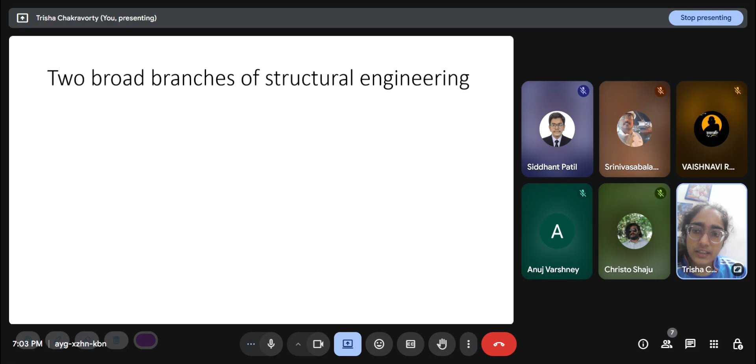There are two broad branches of structural engineering: analysis and design. Analysis is the forward problem. In analysis, we would be given the structural dimensions, boundary conditions, applied loads. So we know everything about the structure, and we want to find out the response induced in the structure, which can be in terms of forces, stresses, deflections or strains.

And in design it is the inverse problem. So we are given the loads that have to be withstood by the structure and some criteria on maximum deflection. The loads have to do with the collapse limit states, and the maximum deflection etc are related to the serviceability limit states. For design, we are given those loads and some constraints, like we cannot decide all the boundary conditions ourselves because there will be some architectural considerations. Then first we have to carry out an analysis, like find the optimum size of structural elements.

How do we do that? We assume some size of the element and some material properties, and then we carry out an analysis. Given these loads, we take our assumed structural dimensions and material, and then we carry out an analysis. So we get the response in the structure, and then we see if that response is good enough, that is, is my structure good enough to take those loads. So design and analysis are not exactly opposites, they are more like two parts of structural design.

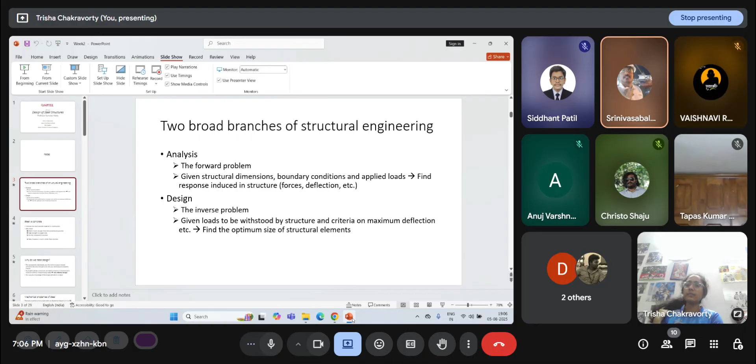So analysis and design, even though analysis is called the forward problem and design the inverse problem, they are not really opposites of each other. They are two branches, and we need analysis for design. The purpose of learning analysis is because we, as structural engineers, ultimately want to design structures.

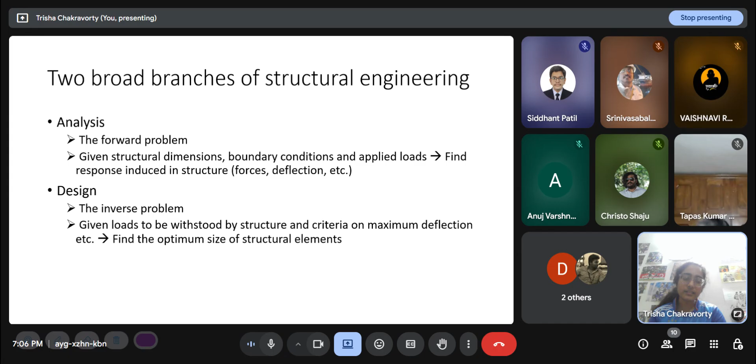Steel versus concrete is always a debate because there are a lot of factors to be considered, and in some cases concrete is more economically viable, in some cases steel is. Concrete is the most versatile material for construction because it can be cast into any shape we want so long as we have the formwork. But then why should we use steel? Because steel is much stronger than conventional concrete.

I spoke about this in the last class. As you would have studied in RCC structures already, even in concrete structures we have steel reinforcements inside the concrete. Why do we have that? Because concrete has no strength in tension. Its entire strength is compressive.

To take the tension, we have to give steel anyway. So we carry out analysis and see in which parts of the structure we expect tension to appear, and there we put the reinforcements. We don't generally put it all along the section.

For bending in a simply supported beam, if it is bending like this, we know the bottom fibers will be under tension, so we put the steel reinforcement in the bottom. While near the supports there might be a hogging moment, so there will be tension on the top fibers, and we put steel reinforcements on top.

But that is concrete structures with steel reinforcements. Steel is needed because concrete has no strength in tension at all, but even in compression steel is much stronger. So steel as a whole is much stronger than conventional concrete, with high strength to weight ratio, because steel is also very lightweight.

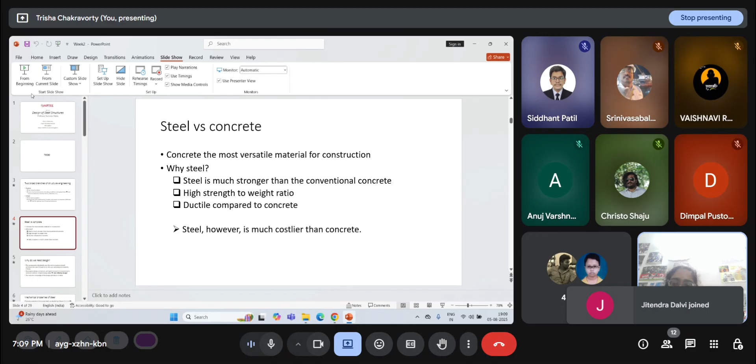In the stress strain curve of steel, we have seen in last class that even after yielding, the strain can increase to a large extent while the stress increases much less. But that strain increment is important for us, because if some element in my structure has reached yielding and is deforming rapidly, we can see that it is about to fail, something is going to happen.

Especially in extreme conditions like earthquake or wind loading, if the structure fails slowly it gives warning, with falling of concrete and so on, and we will have time to evacuate. We want the structure not to collapse at all, but if it is about to collapse, we would want first to save human lives.

So the fact that steel is more ductile than concrete is a factor in its favor. Even in RCC design, if you look at the design criteria in IS 456, you'll see that we want the steel reinforcement to fail before the concrete does, because if concrete fails first, it will be an immediate collapse with no warning time.

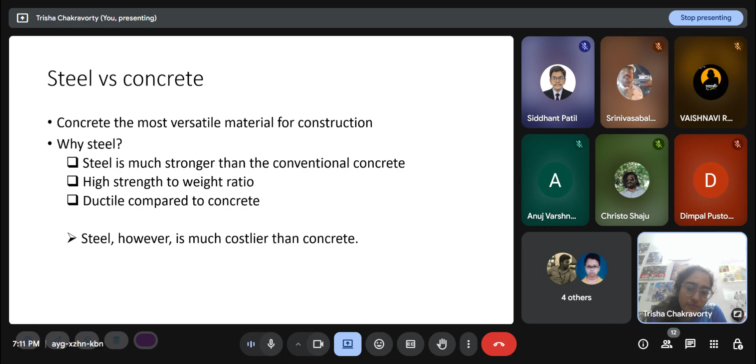However, steel is much costlier than concrete, so that is a main roadblock in using steel everywhere. Generally, residential and institutional buildings we see around us are majorly constructed of concrete. It's the critical structures where we go for steel.

And why do we need design? This whole course is about design. We need design because the components individually and the entire structure should withstand the load throughout its lifespan, satisfying serviceability criteria.

Withstanding the load is the collapse limit state, the ultimate limit state, and serviceability criteria are generally the deflection criteria. And there is a lifespan, because we cannot guarantee that a structure will withstand all loads forever.

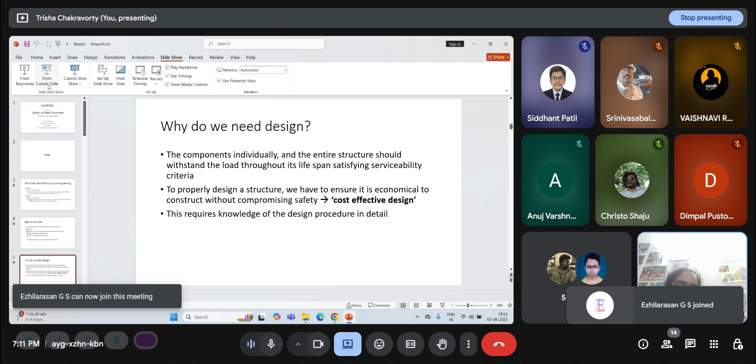So we generally put a lifespan, a time limit after which it will require major repair, because the materials we construct with today will undergo fatigue loading, lose some strength, and behave differently 10 or 20 years from now. So we have a lifespan of 50 years for residential buildings and 75 years for bridges or commercial buildings.

After that, we should hire a civil engineer who will do a structural health monitoring and suggest where and how we need major repair, because we don't generally pull down the structure after 50 years and rebuild it, since there are economic constraints. So we can address the places where there are issues.

And to properly design a structure, we have to ensure that it is economical to construct without compromising safety.

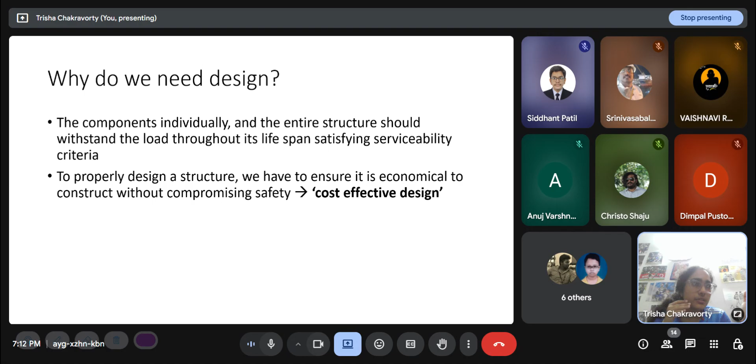This is cost effective design. We cannot make a structure infinitely safe. Look at the columns and beams around you. If you give a larger cross section to the columns and beams, it would affect the utility, and it would make the structure safer, but much more expensive. The purpose of building residential or commercial buildings is that people should be able to afford and use them, otherwise there is no profit for the builder. So there are a lot of other factors apart from safety, and for that we need cost effective design.

Only when we know all the design procedure in detail will we, as structural engineers, be able to find the best way where a certain level of safety is maintained while we reduce the cost.

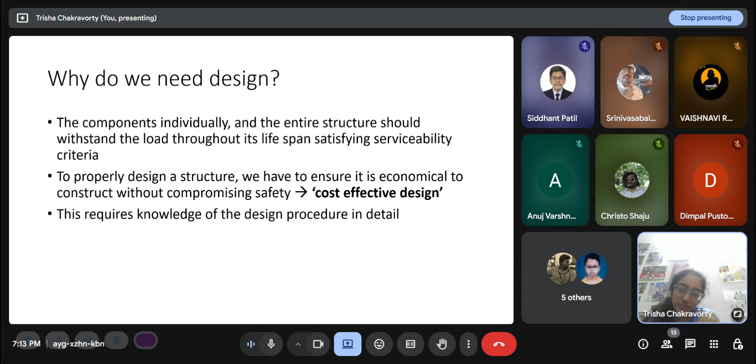Mechanical properties of steel: physical properties of structural steel as detailed by clause 2.2.4.1 of IS 800:2007, the Indian Standard Code for Steel Design. Irrespective of its grade, there are five properties mentioned. The density, or unit mass, is denoted by rho, which is 7850 kg per meter cube.

Modulus of elasticity, or Young's modulus, is the initial slope of the stress-strain curve during its linear regime, denoted by E. It is 2 into 10 to the power 5 Newton per millimeter square.

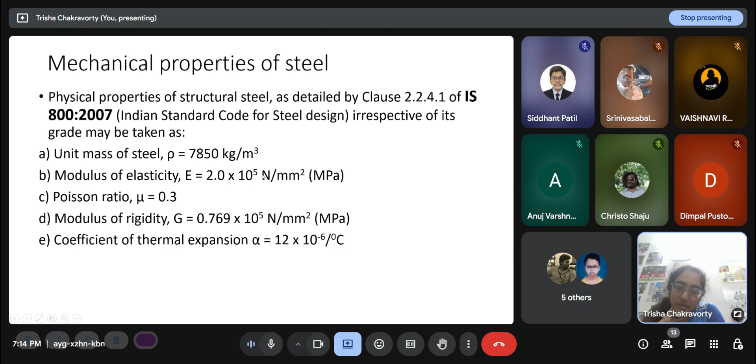This unit, Newton per millimeter square, is actually megapascal, because Pascal is the SI unit, Newton per meter square. Since there is millimeter square in the denominator, a 10 to the power minus 6 factor comes in the denominator, so in the numerator it becomes 10 to the power 6 Pascal, that is megapascal. I'm saying this because this is a unit we encounter very frequently in questions, so stick to the unit system.

A lot of people even at this age make mistakes about units, because it seems a trivial issue, but you should always calculate carefully. You should stick to megapascal or pascal, stick to SI units. That is the safest thing.

Poisson's ratio mu is 0.3. Modulus of rigidity G is the shear modulus, it is 0.769 into 10 to the power 5 megapascal, and the coefficient of thermal expansion alpha is 12 into 10 to the power minus 6 per degree centigrade.

But these are properties that are generally not used directly in design, even though we might need them in some other places. In the design procedure, step by step, we generally don't need this. We need these two properties instead.

The principal mechanical properties of structural steel important in design are the yield stress Fy and the tensile or ultimate stress Fu, which we get from the stress-strain curve. As we discussed in the last class in detail, this is a linear regime up to point A.

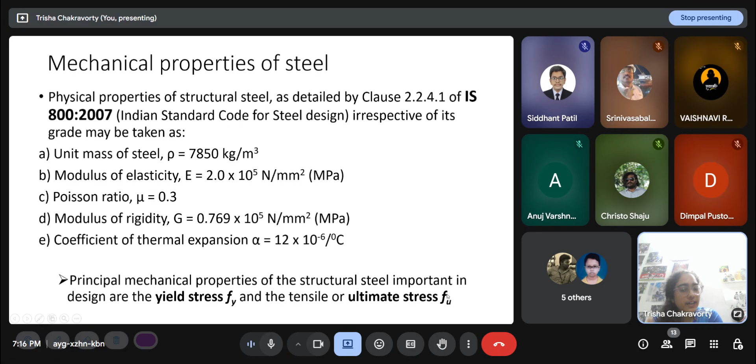There are of course a lot of grades of steel, and this is an important point: these five properties are taken as constants irrespective of grade, but yield stress and ultimate stress heavily depend on the grade of steel you are using. So in one grade, Fe 410, 250 is the yield stress.

After this yield point, the material shows a sharp decrease in the slope of the curve. So for a small increase in stress, there is a rapid increase in strain. After that, E is the ultimate stress point, because it is the highest point in the curve, and stress is plotted on the y-axis. E has the maximum stress, and for Fe 410, the ultimate stress is 410.

After E, we cannot really use the structure anymore because we have to consider it has failed, since even without an increase in stress, the strain increases, and it eventually fails. It eventually fractures at F. But for our purpose, we can consider E as the failure point. It fractures at F, but after E there is no use of the structure anymore; it will just go and fail.

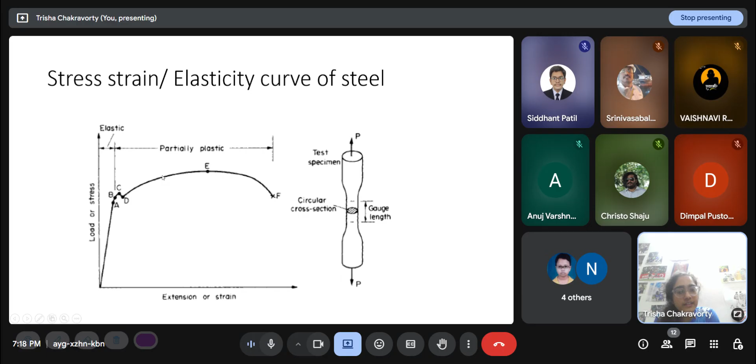But that is not the case for C or D. C or D is not the point where after that we have no use. After C or D, there is a reduction in the stiffness. Stiffness is generally stress divided by strain. Since the slope has reduced, there is a decrease in the stiffness, but it still keeps increasing the stress capacity, so we can load it beyond the yield point. That is the whole point of the limit state method, which we'll look at today in detail.

So these are the points. A is the limit of proportionality, the point where the linear nature of the stress-strain graph ceases. B is the elastic limit, the limiting point for the condition that the material behaves elastically, but Hooke's law does not apply, so the linear relationship is not there anymore. For practical purposes, it can be assumed that the limit of proportionality and elastic limit are the same. Beyond the elastic limit, there will be some permanent deformation or permanent set when the load is removed; that is the residual strain.

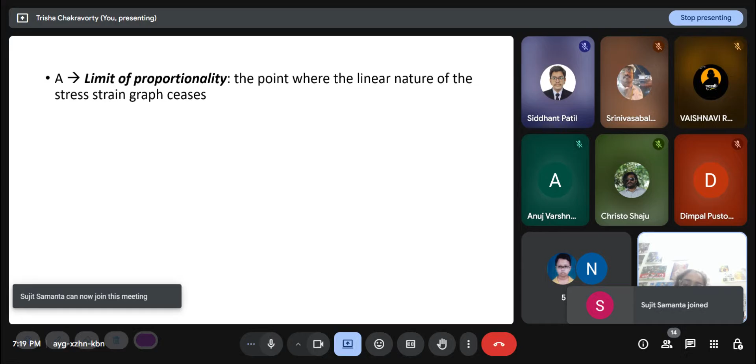C and D are the upper yield point and lower yield point. They are very close by, so they can be assumed to be the same point. These are points after which strain increases without a correspondingly high increase in load or stress. Without correspondingly high means the slope has reduced, but stress is still increasing. You have to keep that in mind.

E is the ultimate or maximum tensile stress point, when necking starts. Necking is a phenomenon shown in this diagram, where when it is about to fail, there is a rapid decrease in the cross section in some parts, and that is where it will fracture. So the fracture generally occurs at one or two points in a structure. It does not just break and splinter apart.

So the point where there is some kind of stress concentration is the point which is weakest. The cross-sectional area reduces rapidly, which is called necking, and then eventually it will fracture. F is the fracture point, where the material breaks.

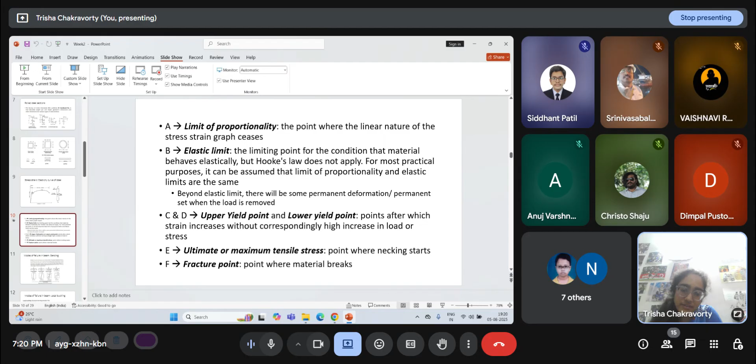Now these are the rolled steel sections that we looked at in the last class. IS handbook number 1 has a tabulation in SP6, published by the Bureau of Indian Standards (BIS), which tabulates the weight per unit length, geometric dimensions, and other dimensions for various types of steel sections. They are more standardized than in concrete.

In concrete, the dimensions are really up to the structural engineer; they can put any practical dimension. But in steel design, we generally go with existing sections because they are factory ready-made in the industry, and they are brought and assembled at the construction site. So this is an I section, a rolled I section. These horizontal parts are called the flange, and this vertical part is called the web.

Generally in design, the flange takes most of the bending, and the web takes most of the shear, in beam design. In concrete design of beams, you would have seen that shear and bending are the two criteria of design.

Then there's the rolled channel, this is a C section, with flanges and a web. Then there are angle sections where the two legs might be equal or unequal. And this is the T section, this is the flange and this is the web.

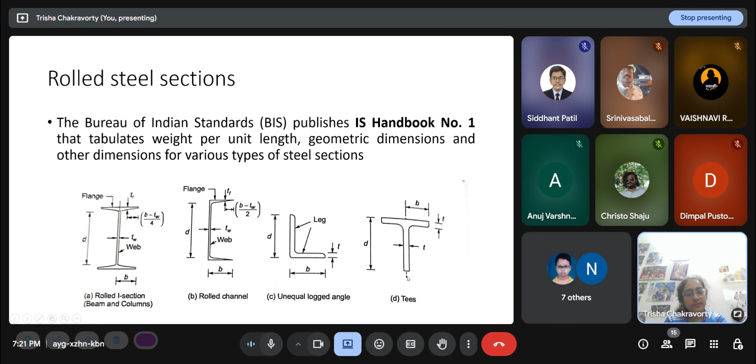And there are some others like square hollow section, rectangular hollow section, circular hollow section, and bars, flats and plates, which are solid sections but very tiny compared to the concrete sections we see. This might be a 15 by 15 or 15 by 20 millimeter section, and the thickness in the flats and plates would also be like 10, 15, 20, out of that range.

In IS 456, the minimum column dimension has to be 250 or 300 millimeters, and the other dimension can be larger. So 300 by 500 millimeter is a very common dimension in concrete columns, but for steel that is unthinkable. A 500 by 300 millimeter steel section is literally unthinkable. So there's a difference in order of magnitude of these dimensions generally. This is just for visualization.

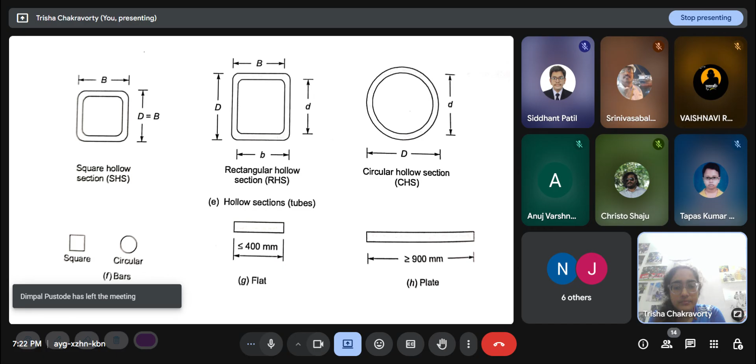Okay, so now we move on to the new topic of today, which is we basically look at the design philosophies.

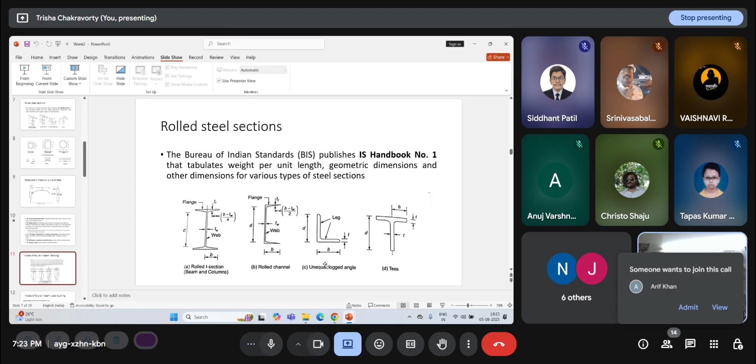For design, we first have to identify the modes of failure in the structure. In concrete beams, mostly it's bending and shear. In steel beams, there are some additional modes we have to see. First is bending. The gravity loading gives rise to bending of the beam, which causes longitudinal stresses to develop in the beam.

We know that bending happens when transverse loading is applied. What is transverse loading? Suppose the beam is something like this - this is the cross section, and this is the length of the beam. So anything along the length is called axial loading, and anything perpendicular to that is called transverse loading. The transverse loading is actually parallel to the cross section.

Sorry, just give me a moment.

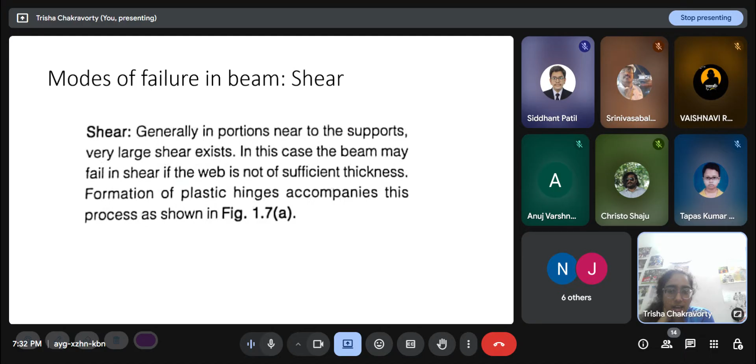This load distribution is a very important intuitive concept for structural engineering. So why is shear greater near the supports?

You would have learned basic bending moment and shear force diagrams in second year or so. Imagine a cantilever beam with a load at the tip: the shear force increases gradually towards the support, and is maximum at the support. So generally, for a simply supported beam, bending failure occurs at the center, and shear failure occurs at the supports, because the bending moment diagram peaks at the center while the shear force diagram peaks at the supports. So even though the length of the beam is like this, the critical shear against which I design the beam is generally the shear expected to develop at the supports.

Another mode of failure in a beam is shear buckling. Shear buckling happens during the shearing process — if the web is too thin, it is prone to fail by buckling. The web itself might undergo compressive failure, or it might undergo buckling failure; these are different. Generally compressive failure occurs as crushing, like in concrete — if a concrete beam fails in compression, the crushing reduces the column's height and it collapses. But this can happen for steel beams as well. So this mode of failure is when the web fails in compression, versus shear buckling when it fails by buckling. The source is shear in both, but the modes of failure are different, so there are two different design criteria: one for compressive failure, one for buckling failure. We'll look into that later.

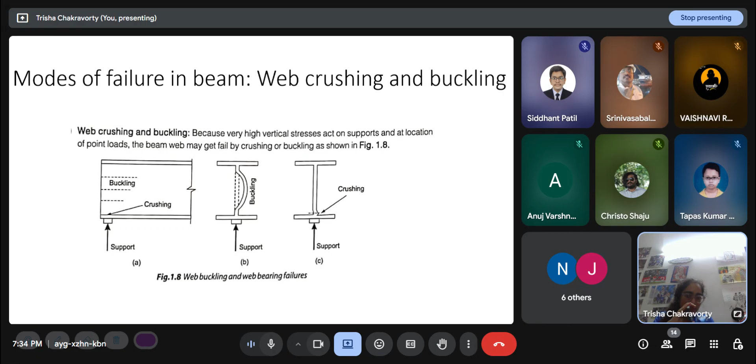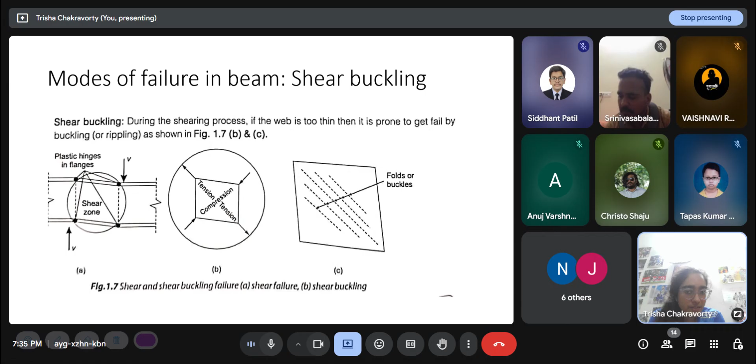So shear buckling occurs when, due to shear, the web buckles. Web crushing and buckling happen because very high vertical stresses act at supports and at concentrated load points, so the beam web may fail by crushing or buckling as shown. Here the web undergoes shear buckling, and web crushing and buckling, at different locations. When shear acts, the web buckles like this — that's web crushing and buckling, also due to shear. This other one is a little difficult to explain, but it buckles along the length of the beam; it's hard to visualize unless you actually see these structures. But there are different design criteria in IS 800, which we will go through step by step when looking into the design of beams.

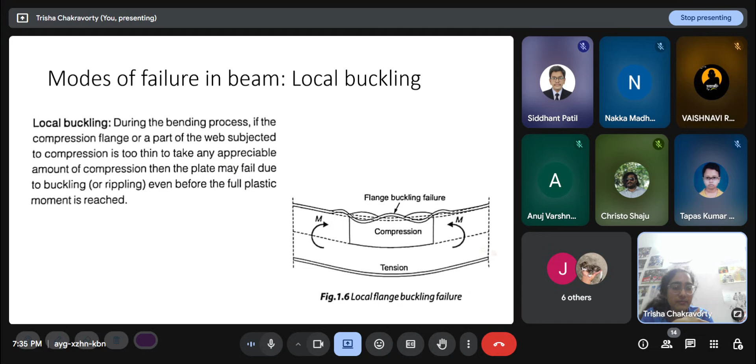Lateral torsional buckling: this type of failure occurs when the beam has high flexural stiffness in the vertical plane compared to the horizontal plane. The vertical plane is the gravity plane, and the horizontal plane is this other one. When a bending moment is generated in the beam, if the flexural stiffness in the vertical plane is very high — this is basically bending in the vertical plane — then if the strength of the beam is high in this plane, this bending doesn't cause trouble. But bending in the horizontal direction, if the bending stiffness is less, causes it to buckle along the length of the beam.

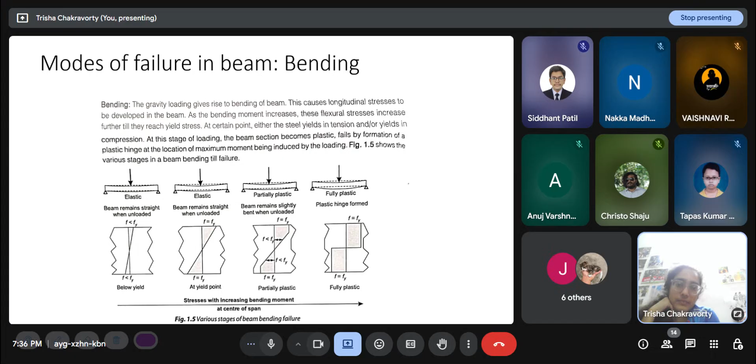So far, all the modes we've seen — bending, local buckling, shear buckling, web crushing and buckling, and lateral torsional buckling — all of these were collapse limit states.

If these limit states are violated, that means the developed force or stress becomes higher than the stress capacity of the structure or material, so that will lead to a collapse or breakdown kind of thing.

So all of these were ultimate or collapse limit states, and the other kind are serviceability limit states, which have to do with deflection. It's quite practical that a beam may not fail due to excessive deflection, but too much deflection can lead to discomfort to occupants along with stripping of flooring, finishes, etc.

Deflection is actually a less serious mode of failure than the collapse limit states, because if a structure collapses, the worst damage to life and property is going to happen. But deflection is also a criteria, so there are some upper limits to maximum deflection that we allow in a beam, a column, and all structural elements.

That is because too much deflection, firstly, even if the beam has not collapsed, as residents we will think something is going to happen, so we are going to call someone to repair it anyway. So in residential buildings, that is not going to serve its purpose.

Flooring and finishes like tiles are not actually structural elements, since a structural element is expected to take a load, but these are not, they are just placed on top. So if the slab deflects a lot, there might be damage to the flooring. In industrial structures, especially mechanical or civil engineering industries, excessive deflection might hamper the movement of equipment. In parking lots, it might create difficulties in headroom requirements. So deflection is also a criteria we have to consider, even if it is not as serious as the collapse limit states.

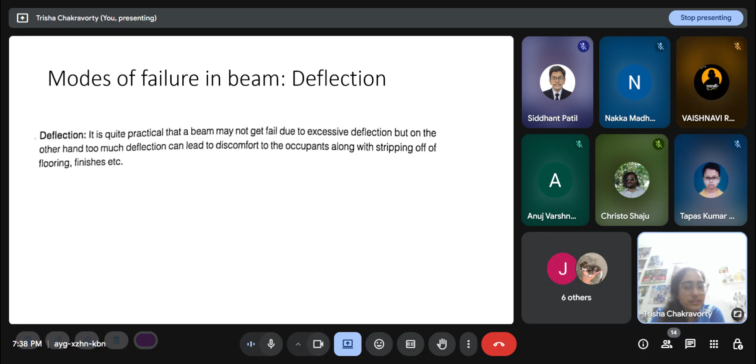Okay, now we have looked at the modes of failure. Now we look at the loads, which is what we are designing the structure against. Loads are the forces that act on a structure. Loads are in fact action on a structure, due to which the structure responds, that is reaction, and the reaction causes stresses and strains in the structure. This action acting on the structure may either be direct action or indirect action.

Direct action loads act directly on the structure and include dead loads, live loads, snow load, and wind load. Dead load is the self weight of the structure. Live load is the furniture and human beings moving on the structure, all that movable thing. Furniture is also live load, sometimes it's mistaken to be dead load, but it is not, dead load is just the self weight of the structure.

Snow load is not relevant in India. Wind loading is important, especially near the coast where the wind is high, or in high altitude structures. The intensity of these direct actions have been described by various codes or standards.

In India, we have IS 875. Part 1 describes dead load, Part 2 describes live load, Part 3 describes wind load, and then snow load and various possible load combinations are in Part 5. IS 1893 is for earthquake load. So these are all direct actions.

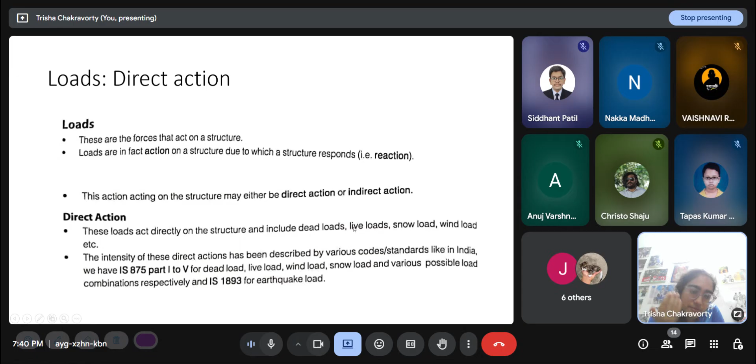Earthquake loading is very important because India has several high risk earthquake zones, so we generally design against dead, live, wind, and earthquake loads. Then there are some indirect actions, where load acts on a structure indirectly due to temperature change, settlements, deformations, etc. These indirect loads also need to be taken into account.

Now there is something called fire resistant design. In case there is a fire, we would not like the entire structure to collapse completely. In steel, the temperature part is an issue because it has quite a high coefficient of thermal expansion. So we would think that if the temperature increases by this amount, there could be some strain in the structure, then some stress, so we would like to take that into account.

Settlement of foundation is something we consider too. Suppose the foundation settles to some extent, we don't know what the conditions will be, but there will be rules in our IS codes. We cannot just assume how much will settle. If there is uneven settlement, one side settling more than the other, the slabs and beams on top will undergo bending load. These are indirect actions that induce stresses and strains in the structure, just like direct actions do, so we also take them into account.

And there are reactions due to action on the structure. As per the limit state method of design, the structure is required to satisfy the limit state of serviceability as well as the limit state of collapse. A structure needs to be assessed for the effects of design loads and actions, including its individual members and connections. This analysis is done either by using the elastic or the plastic method of analysis, which we look into later.

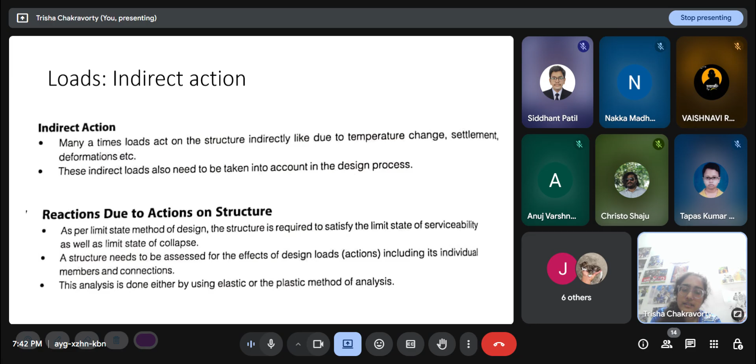Now we come to the design philosophies of steel structures. Errors and uncertainties get involved in precisely assessing the probable loads that will act on the structure and the structural behavior of materials. This is uncertainty, and uncertainty quantification is actually a research area in civil engineering, which is what I work on in my PhD. It's so important because firstly, the loads are completely uncertain.

You can clearly imagine that, because we don't know when a fatal wind load or an earthquake is going to come. All of that involves some kind of prediction. Climate change also has some kind of predictions involved.

And even the material we are getting, suppose the factory sells a structural engineer some steel section saying this is Fe 410, so the yield stress is supposed to be 250. But what if there was some error in the manufacture itself? The exact dimension might not be what I expected, the exact strength might not be what I expected. So there is always a factor of uncertainty which we cannot really ignore in civil engineering design.

So the various structural design requirement criteria relate to the corresponding limit states, and they also have an inherent safety requirement. You know there are factors of safety applied on the loads and the materials. Why do we do that? It is not a yes or no thing, not that if I put this it is safe and if I don't it's not safe. It's basically introducing an inherent safety level. There are some kinds of indicators which say how safe a structure is.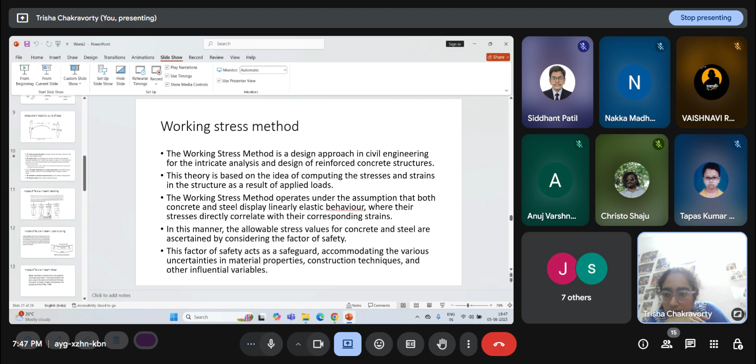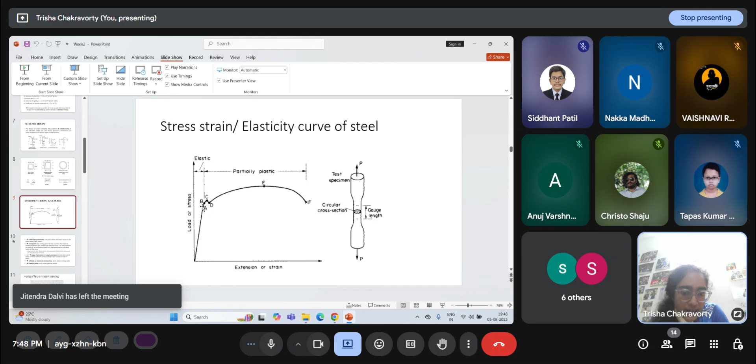So let's go back to the stress strain curve to see what this implies. The working stress method is only going to let us work in this zone, the zero to A part, this origin to A part. Up to C or D it generally applies, up to the yield strength, but you can see this is a very small zone. A is the linearity limit, after which Hooke's law is not followed, and yielding comes quite immediately afterwards. So this is where the working stress method limits itself.

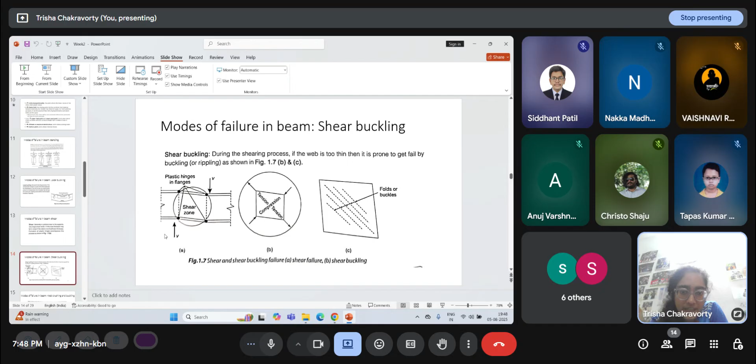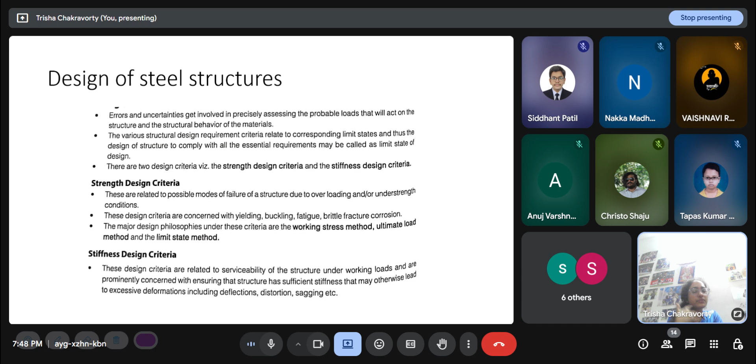If the structure yields, it has failed. So that is kind of underutilizing the structure's capacity, but that is the philosophy here. And it of course makes the structure more safe because you are just assuming that the steel has only a strength of 250. So if you underestimate the strength of the material, then you are actually making the structure safer.

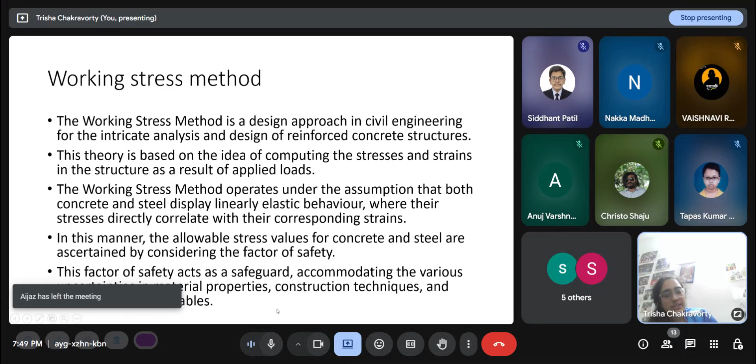In this manner, the allowable stress values for concrete and steel are ascertained by considering the factor of safety. This factor of safety acts as a safeguard, accommodating the various uncertainties in material properties, construction techniques, and other influential variables.

Advantages: the working stress method is relatively simple to understand and apply, making it accessible to engineers and designers, and especially laymen who don't have a very extensive background, like diploma engineers. I'm not saying they are laymen, but diploma engineering has a smaller coursework compared to civil engineers doing the BTech, the bachelor's program. So diploma engineers, since the working stress method is very accessible, can also execute it with much lesser knowledge. It has been widely used for many years and is well known among engineers and construction professionals.

This is also important because, especially in India, there are so many other stakeholders in any project. So you are employing the same promoter who has been doing building projects for 30 years. They have a set of estimations, and they are very reluctant to move to a new method. Since this method is well known among engineering and construction professionals, people are reluctant to move on from it. So the working stress method is still demanded from engineers in various projects.

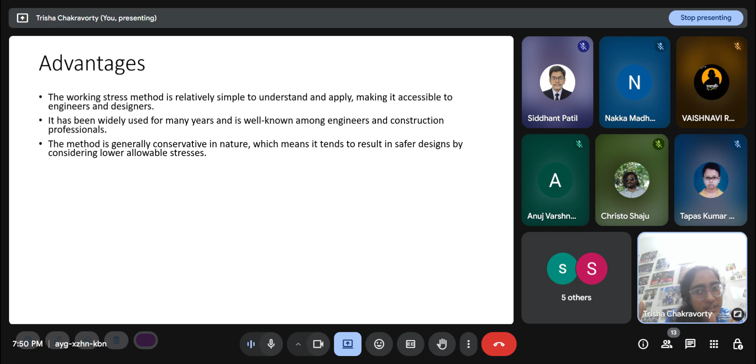The method is generally conservative in nature, which means it tends to result in safer designs by considering lower allowable stresses. If you underestimate the structural strength and overestimate the load, you are going to end up with a safer, but less economical, design. It allows for easy comparison of the design with permissible limits, ensuring that the structure stays within safe limits.

By using this method, engineers can achieve economical designs by optimizing the use of materials while adhering to safety standards. The working stress method can be easily integrated with IS codes and standards because the oldest and first IS codes followed this method. It is particularly suitable for designing simple and common structural elements like beams, columns, and slabs. The method is often based on empirical data and real world experience, making it reliable in practical applications.

Now, in civil engineering, time is always a safety factor. Like we feel that if a structure, suppose all the bridges that were constructed in India during or before independence, a lot of them are still standing, and they were built based on the working stress method. So we know that those bridges have stood for almost 100 years, so they are bound to be doing something correctly. Since they have stood the test of time, we tend to trust them more.

The analysis required for this method is often less complex than other advanced methods, making it feasible for smaller projects or situations where advanced analysis isn't necessary. The method's long history of use in engineering practice attests to its reliability and effectiveness.

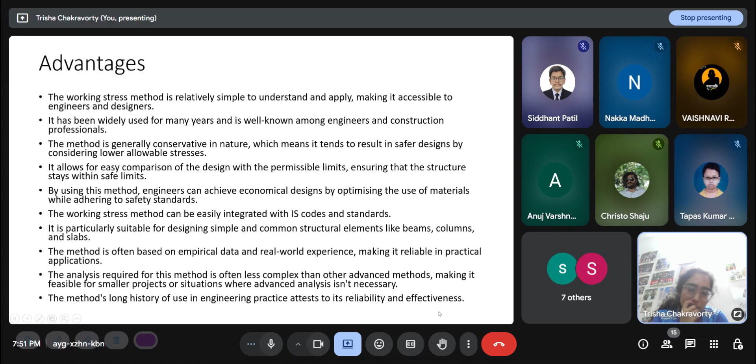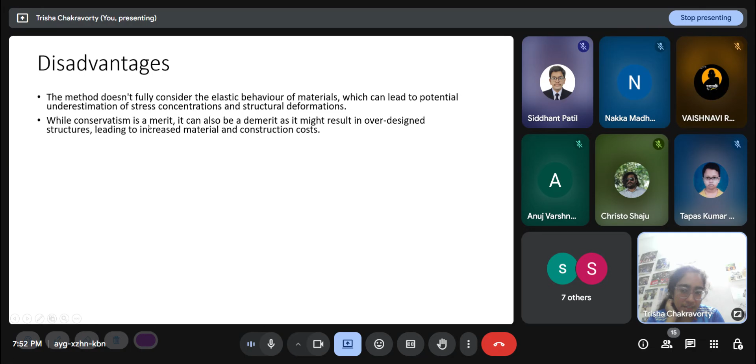There are some disadvantages. The method doesn't fully consider the elastic behavior of the material, which can lead to potential underestimation of stress concentration and structural deformations. While conservatism is a merit, meaning more priority to safety, it can also be a demerit since it might result in over-designed structures, leading to increased material and construction costs.

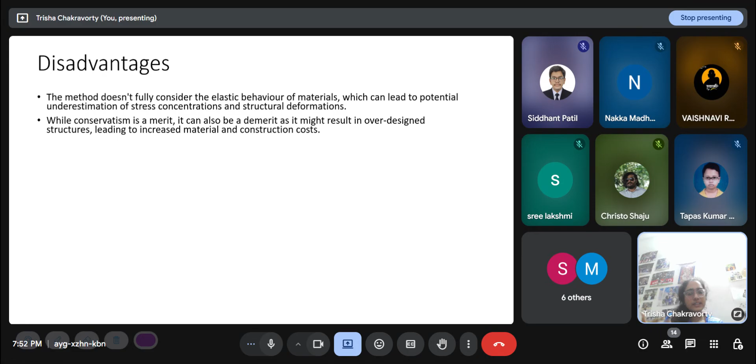So suppose, just a simple example, if you assume the concrete element, a concrete beam - if I assume that its yield stress is 100, versus if I assume it is 200. If I assume it is 100, I'm going to end up with a larger cross section. That is what is called over design, because maybe the section can take up to 200, but I am saying no, I'll assume it only takes 100, so I end up with a larger design, and that is an over designed structure, which leads to increased material and construction costs.

The method's reliance on allowable stresses can make it sensitive to variations in material properties, potentially leading to inconsistencies in design. It is unsuitable for complex structures and situations involving non-linear behavior, dynamic loads, or unique loading conditions.

Because we are oversimplifying the problem so much. We are just saying that the stress and strain is going to have a linear relationship. So if it goes into the non-linear regime, the working stress method does not know what to do. Dynamic loads means time varying loads, so earthquake loading is a dynamic loading.

It is not really practical. None of these - non-linear behavior, dynamic loadings, or different loading conditions - none of it can we actually guarantee is just going to stay in the linear elastic regime. So it is a very oversimplified method. If you go for complex structures, you have to think beyond that.

Depending solely on allowable stress limits might not provide adequate safety margins for modern construction practices, which often involve diverse and dynamic loads. The method might not adequately address the effects of multiple simultaneous loads, which are common in real world scenarios. It doesn't consider the redistribution of stress after a structure yields, which can lead to localized failure. This is an implication of assuming that structural elements can only take up to the yield stress.

So in case the structure does yield, in case one element does yield, so what? Suppose there are two elements, a beam and a column. For working stress method, I'm going to assume that if this beam yields, it's going to fail - it is going to just disappear. If we see a structural element fail, we can assume that it is not there in the structure anymore because it is not going to take any more load. So if I'm assuming that this beam yields and disappears, then the column does not have any particular loading right now from that beam.

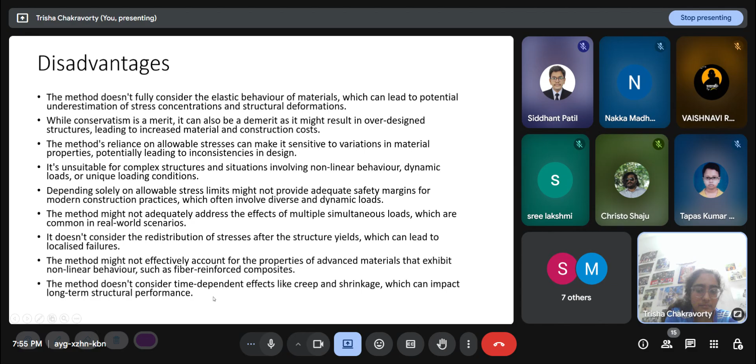The method doesn't consider time dependent effects like creep and shrinkage, which can impact long term structural performance. This is why the lifetime of a structure is mentioned, because there are some time dependent effects which we have to take into account. And then we move to the limit state method.

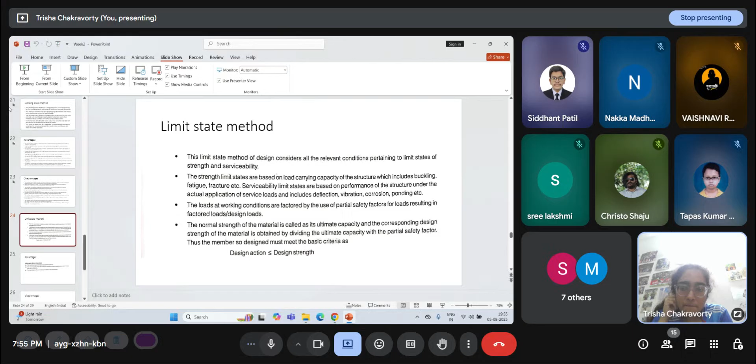This limit state method of design considers all relevant conditions pertaining to limit states of strength and serviceability. The strength limit states are based on load carrying capacity of structure, which includes buckling, fatigue, fracture, etc. Serviceability limit states are based on performance of the structure under actual application of service loads and includes deflection, vibration,

corrosion, ponding, etc. The loads at working conditions are factored by the use of partial safety factors for loads, resulting in factored loads or design loads. The normal strength of the material is called the ultimate capacity, and the corresponding design strength of the material is obtained by dividing the ultimate capacity by the partial safety factor.

So the limit state that has to be satisfied is that the design action should be less than the design strength. So just for an example, suppose I am assuming a load, there's a design load from my wind load calculations, I get 10 kilonewton. That is the working load. Then I'm going to apply a factor of safety multiplicative with this load. Suppose 1.5, which is a common factor of safety for dead loads. 1.5 into 10 is 15 kilonewton. So I'm going to assume that I have to design the structure against 15 kilonewton.

And then the design strength, the yield stress of steel is 250 MPa. I'm going to put a factor of safety in the denominator, so 1.1 or something, I'm going to bring it down. So I'm going to overestimate the load a little bit, and underestimate the strength a little bit. But the strength is not limited to the yield strength.

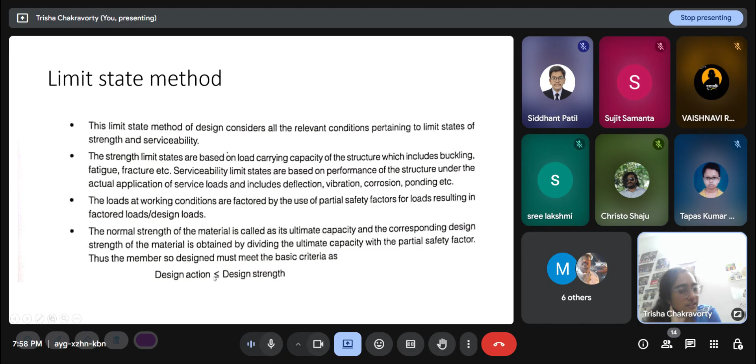And for the load also there is a safety margin, because we are assuming a greater load than I'm actually expecting. So the design action should be less than the design strength - this is the limit state that must be satisfied. Being satisfied means that the design strength is greater than the design action, that means my structure is safe. And if the limit state is violated, that is the design action becomes greater than the strength, that is when the structure will go close to failure.

Advantages: this method recognizes that design parameters are variants. This method logically deals with the fact that there is always a possibility of variations in loads and material properties. That is why uncertainty quantification and reliability studies have been incorporated into limit state design. So the factor of safety actually accounts for this possibility of variations, or the coefficient of variation.

This method gives different weightages to different loads and materials. So yes, the factor of safety on load and in the denominator for materials are not all the same. In the design codes you will find those factor of safety values you have to take. So dead load has 1.5, wind live load has 1.2. These factor of safeties have been decided due to research on the general variability that I'm expecting on that kind of loads. So I'm not just giving a blanket factor of safety for all kinds of loads, it is tailor made to account for the particular load I'm considering.

There has been a lot of research work going behind this. So the research comes first, and then the codes - the IS codes are a step-by-step kind of design tool which anyone can use even without knowing the background, but the research components are actually incorporated or embedded into the methods automatically. One example of that is the different factor of safeties for different loads and materials.

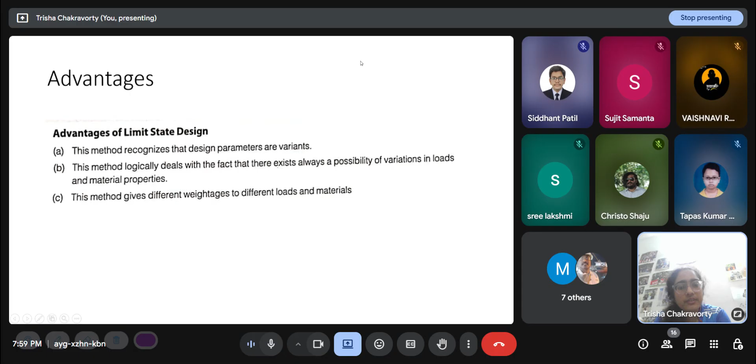A disadvantage is there's a likelihood of design errors because of the more complex theory, which is not so in the working stress method of design. When anything is more difficult to apply, the chance of error increases.

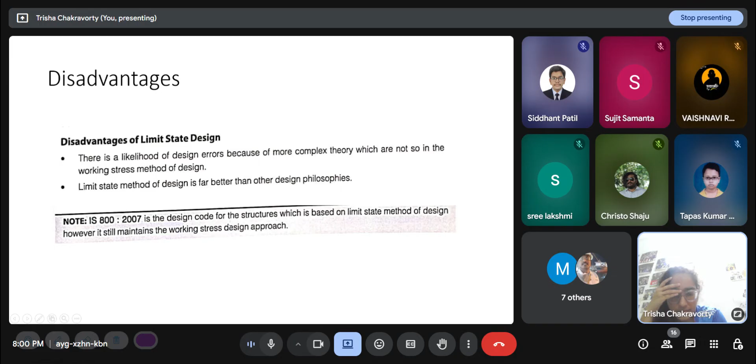This is not a disadvantage though - limit state method of design is still far better than other design philosophies. That's why almost all codes around the world now follow it. IS 800 2007 is a design code for steel structures based on limit state method of design, but it still maintains a working stress design approach, so near the end you'll find an appendix or chapter on the working stress design approach.

Design load in limit state method is obtained by multiplying the working load by the partial factor of safety, and the resulting load is called the factored load or design load. Different design loads, like dead load, live load, wind load, earthquake loads, are then combined under the most severe but realistic conditions.

We don't just design the structure against dead load and live load separately, because live load, wind load, and dead load will always occur together. And when wind load and earthquake load come, it's not only the earthquake load applied on the structure - the dead load and live load are still there.

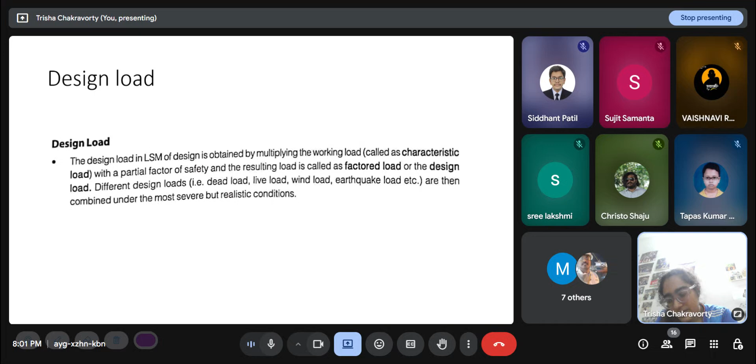There are also load combinations in IS 875, like IS 875 part 5, which has the load combinations. So to become a structural design engineer, you need knowledge of all these codes especially. And the design strength of the material is obtained by dividing the characteristic strength of the material...

...by a suitable partial factor of safety. The design strength of each material and their connections must be such that the most severe combination of design loads must not cause failure. So the most critical limit state will be where the design load is maximum - I want the design strength of each material to withstand that worst load combination as well. It must also be ensured that the structure is stable against overturning, sway, etc.

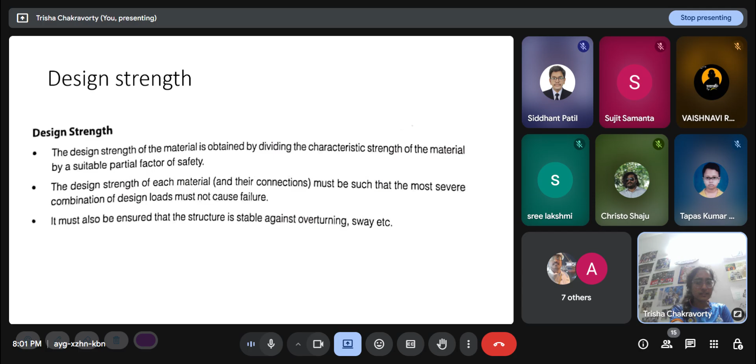There are some stability criteria which are generally automatically incorporated if we are designing against strength. So these were the basic design philosophies of steel design and design in general. Are there any questions?

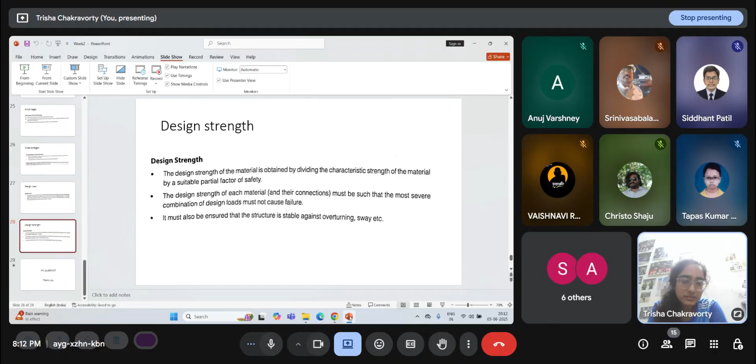Okay, then we'll meet next Tuesday and we'll look at bolt design and buckling.

Okay, wait one second, I'll try something to visualize it.

Just imagine a sheet of paper. Suppose this is a column, this is a cross section, and this is the length. If you apply a compressive load, this phenomenon that is happening is bending - it's bending in this frame. This is basically what buckling is. So if you take a very tall, thin structure and apply a compressive load, if you increase the compressive load, you will see it automatically undergoes a buckling kind of thing. That is called buckling. You have to visualize it, imagining a paper or a straw or something.

That is the intuition. What is the difference between slenderness and buckling? Slenderness is a property of a cross section - it's not a material property, it's a geometric property. Slenderness ratio has to do with the length and the cross sectional dimensions. It's a physical qualitative property of the structure, and slenderness ratio is the quantitative property of the cross section. Buckling is a phenomenon that is a risk in slender structures. So if the slenderness ratio crosses a certain limit, I have to assume that buckling is a viable mode of failure, and include it in my design criteria - I have to assume that it can buckle. This is another extra equation. Like in beam design we use bending and shear equations, here we have to use a buckling equation as well if the slenderness ratio crosses a certain limit. They are different things, but they are related.